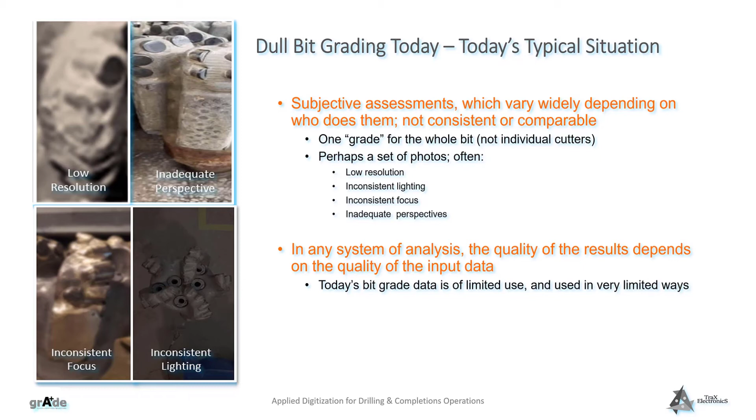They found their bit wear data of limited use because of the subjectivity and inconsistency of the data they were getting, as well as the fact that it offered no individual cutter results. As well, the photos of the dull bits they had were most often taken by cell phones, which suffer from lower resolution and perhaps more importantly, lower lens quality. There were also issues with lighting, focus, and perspectives on the areas of importance.

At the time, they had 10 rigs or so running in close proximity, so we planned to locate the hardware at a central point in the field and bring the bits to that location. One of the first methods we looked at was handheld 3D scanning. We used a commercially available 3D scanning service to scan a dull bit. The results were reasonably good, but we concluded this method was not really viable because it required a trained technician to perform the scan. It took a significant amount of time for the technician to produce a good model, and the hardware was relatively expensive.

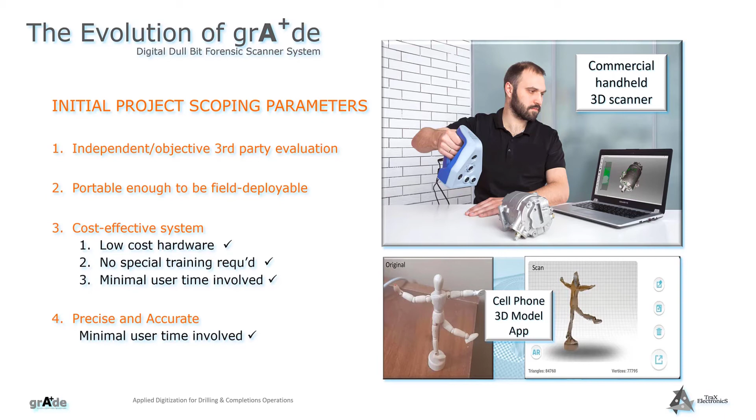Another project scoping requirement was that the technology developed produce cost-effective results. In effect, this meant that, in addition to low-cost hardware, the system could not require any additional manpower or special training to operate it. We also briefly investigated cell phone 3D scanning, which, although it sounds very appealing, was ultimately rejected too, because of the poor quality of the results. Taking all the requirements into consideration, it was decided to design and construct an autonomous system using photogrammetry to build 3D models.

There were a number of reasons we wanted to focus on producing 3D models, rather than relying on high-quality photos, for example. Firstly, a manipulatable 3D model is far superior to a collection of photos for viewing. Just as a picture is worth 1,000 words, a 3D model is worth 1,000 photos. Secondly, 3D models are much better for assessing wear and damage to the bit body in addition to the cutters, and they are the only way to produce heat map comparisons to sharp bits. Thirdly, 3D models have significant advantages over 2D images when applying artificial intelligence approaches. And lastly, we thought if you're going to produce high-quality photos anyway, why not go all the way to produce a 3D model and reap all the extra benefits they provide?

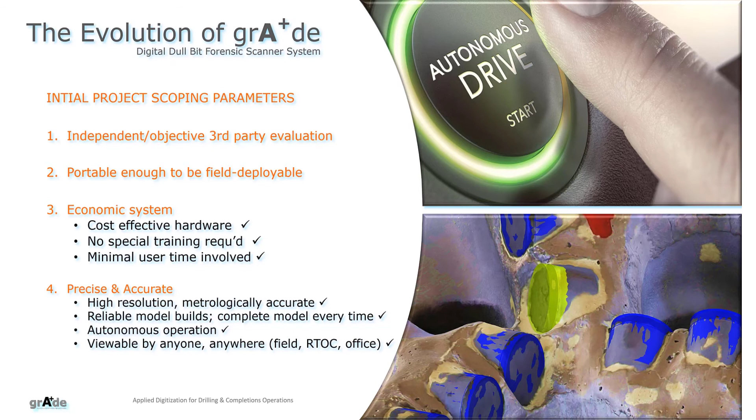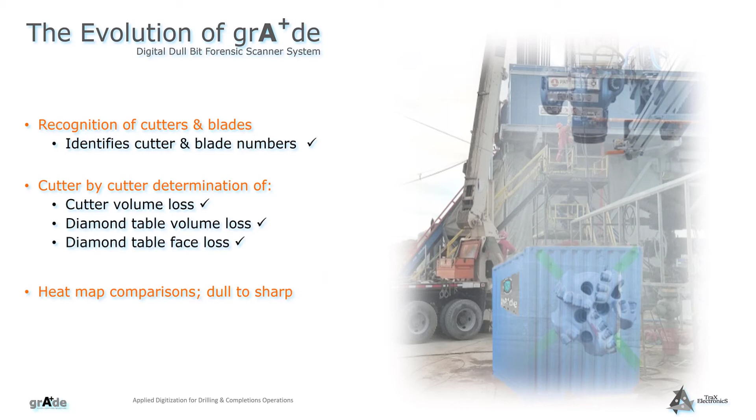Phase 2 of the project included upgrading the software to include analysis of cutter wear and damage, more specifically, automatic identification of cutters and blades, cutter-by-cutter estimation of cutter volume loss, diamond table volume loss, diamond table face loss, and heat map comparisons of dull to sharp bits. Phase 3 of grade's development involved the assessment of other parameters that might be viewed as judgment parameters, as opposed to the more calculable parameters in Phase 2. The software is now capable of analyzing for these parameters as well, with the accuracy of the results continuously improving as we scan more and more bits.

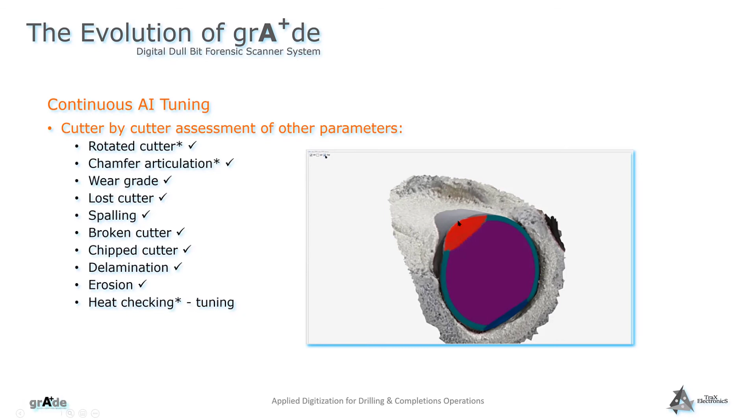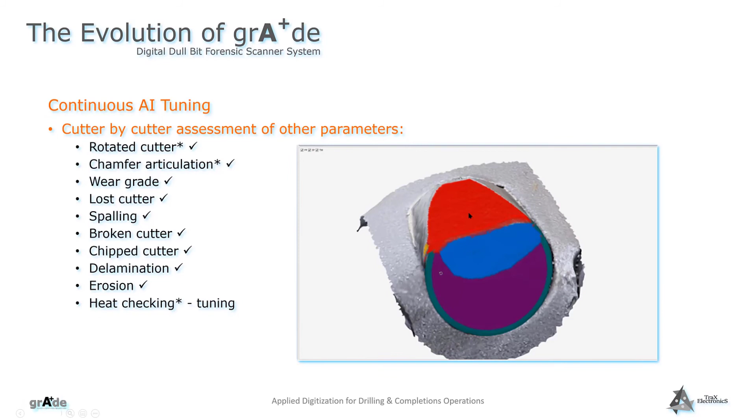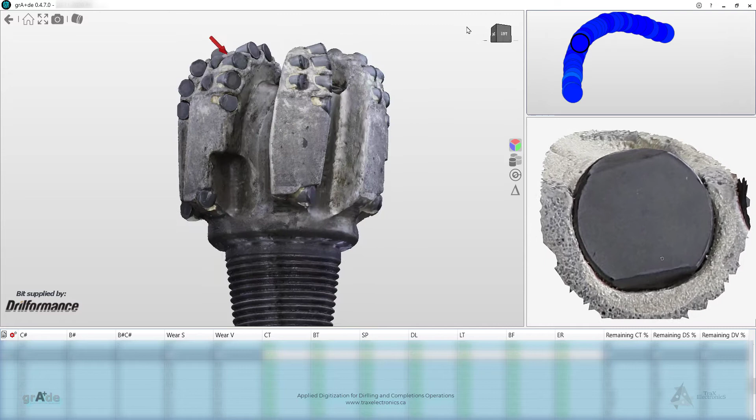Thanks, Ron. Grade, the autonomous AI-enhanced digital dull bit forensics system. A state-of-the-art system consisting of 3 components: a push-button autonomous robotic scanner, artificial intelligence engine, and an output software viewer. The user simply loads the bit into the scanner, names the bit, and presses go. The results include a high-resolution, isometric model that can be dynamically manipulated in all axes.

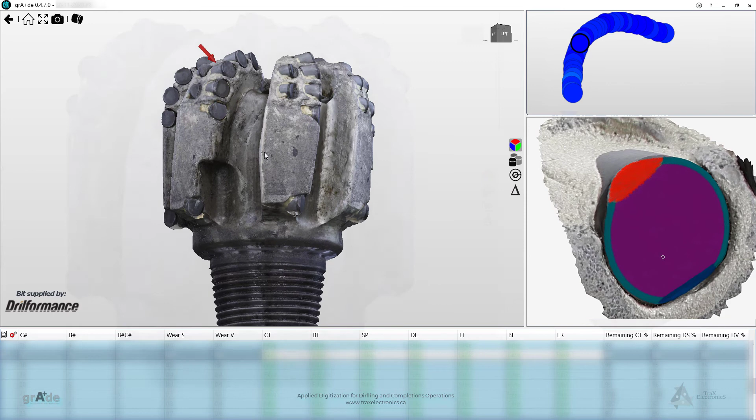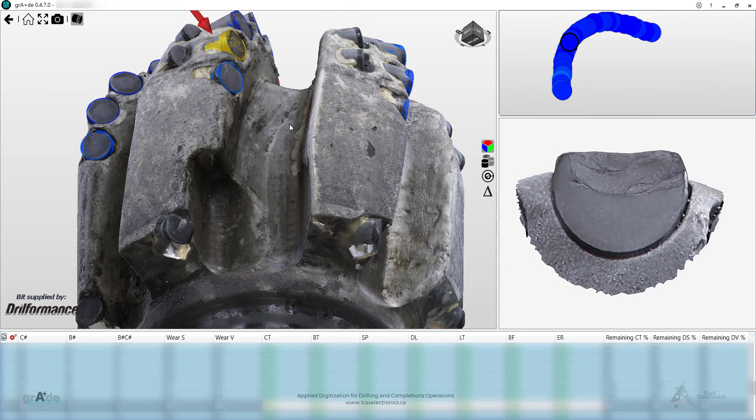In addition to conventional software tools, centering, screenshots, home, etc., you can also apply the cutter toggle to any of the heat mapping analytic masks, toggling on and off where the original cutters were located to gain a relative impression of the damage profile. The user can also select specific individual cutters on the bit model in order to further review in detail in this side window. You will note the metadata table on the bottom corresponds to the selected cutter. The data in the exportable table is the output of the artificial intelligence engine, which locates cutters and blades and defines wear and damage. It also articulates the legacy IADC characteristics, such as lost cutters, delamination, heat checking, etc.

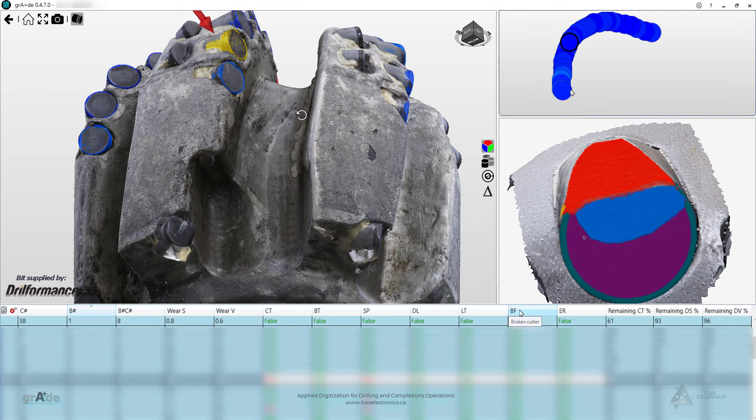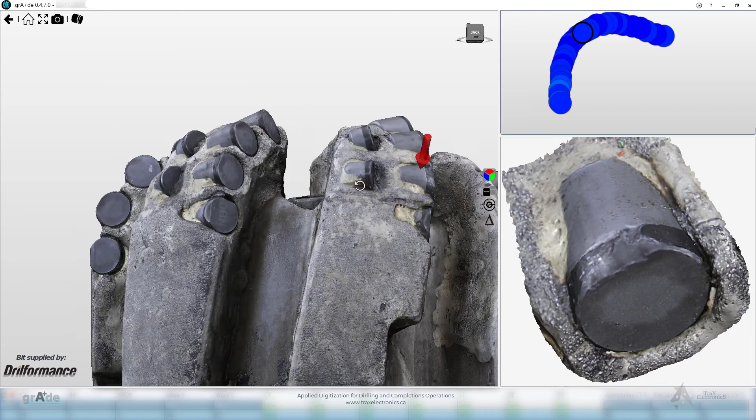Supplementally, grade provides a relative sharp to dull bit total remaining cutter percentage, remaining surface diamond percentage, and remaining total diamond table percentage. In addition to the raw texture map, there are 3 heat map masks that can be applied to facilitate forensic analysis. The robotic grade scanner yields results with metrological resolution in the order of 10 microns in order to provide the artificial intelligence with the data sufficient for precision.

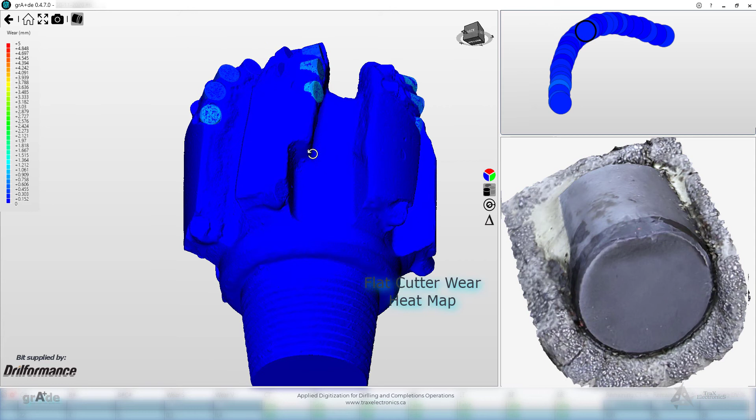The graduated chromatic scale on the left of the screen shows step changes from blue, intact, to red, missing, and graduation of wear in between. The flat cutter wear heat map is used to accentuate surface wear. As with all the other masks, tool sets, and toggles previously mentioned, the model can be fully manipulated in this format. The wear by radius heat map is used to visually enhance surface body matrix striations to define where on the bit the work was done, nose, gauge, shoulder, etc.

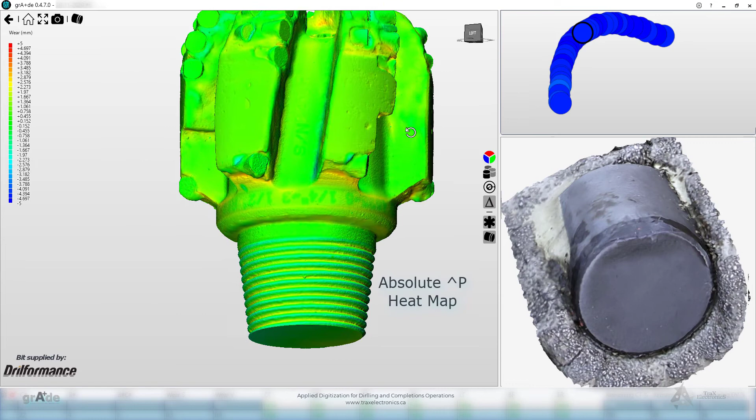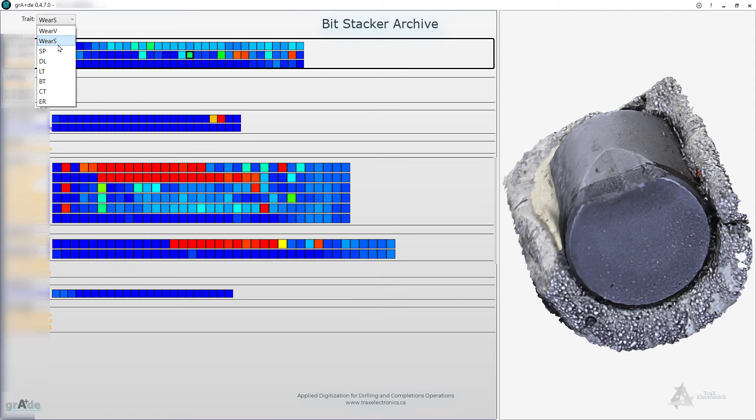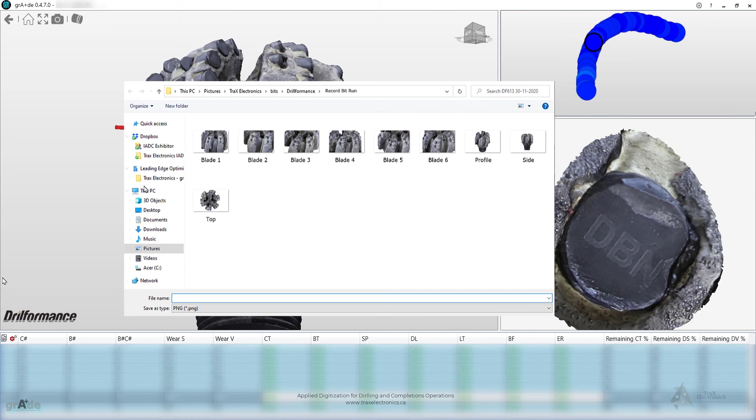This can be done not only by wear volume, but surface wear, and of course all the other specified legacy IADC characteristics and enhanced grade wear characteristics. From this screen, you load any bit from your archive for analysis. Lastly, the Grade Digital Dull Bit Forensic System is flexible in that you can take high-resolution pictures for communication purposes and sharing. And the metadata grade table is exportable in order to be applied against EDR or other datasets for drilling dysfunction, root cause, forensic analysis.

I will now pass you back to Ron to explain a little bit more about how to leverage the artificial intelligence and optimize drilling performance. Thanks, Sean. So what's next? The IADC objectives for revisions to the grading system that were discussed at the beginning of this forum envision root cause analysis as an important aspect. We'd like to show a quick example of how digital dull bit forensics could enable this.

On the left, we have data from the lateral portion of a horizontal well drilled in early 2020. The lateral was roughly 11,000 feet long and required 4 bits to finish. The dark trace is ROP, and the orange trace is a calculated parameter related to MSE, or mechanical specific energy. There were different types of bits run, and only bit number 2 was scanned.

The scan data is represented by the column graph in the upper left, which shows the percent remaining diamond table from 0 to 100% along the vertical axis, versus the individual cutters numbered along the x-axis. This chart indicates a non-uniform pattern of wear, with significant damage to many of the cutters.

Contrast this with the chart on the right, which shows another lateral in the same drilling program, where the same model bit drilled the entire 10,000-foot lateral, with low wear in a uniform distribution along the cutters, and no significant damage. Although we don't have time to go into detail in this forum, we postulate that a major reason for the shorter run in the first example was cutter damage caused by drilling dysfunction.

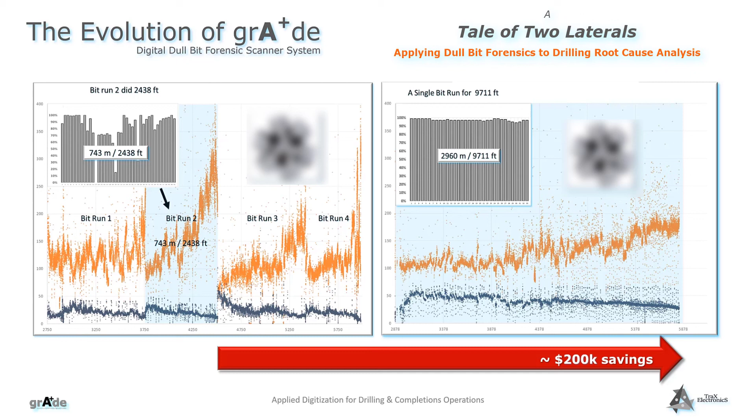In terms of the potential benefits to this approach, we estimate that the savings in bit trip costs between these two examples was in the order of $200,000 for the lateral portion alone. In conclusion, we feel that a digital dull bit forensics approach, such as the one outlined here, fits well with the work the IADC has undertaken to upgrade the grading system. Bit vendors and cutter suppliers can obviously use this data to review and improve designs, but the data can also be of enormous value to E&Ps seeking to improve performance by mitigating bit damage related to drilling dysfunction.